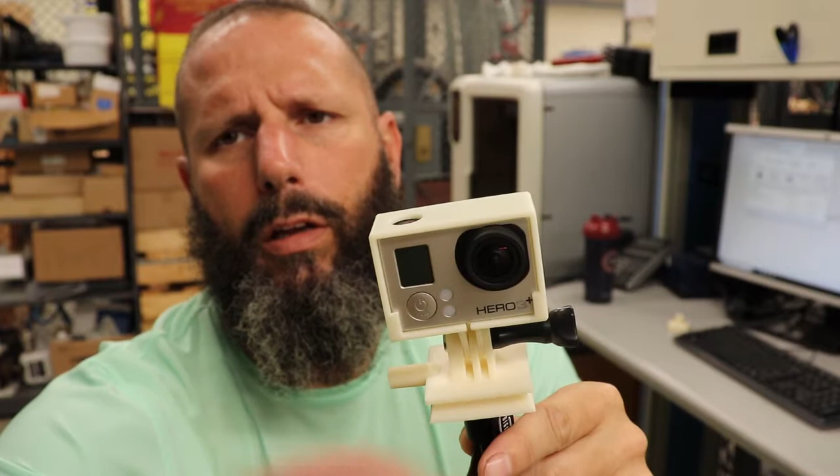So anyhow, it's a GoPro mount, and it has the little nubbin out here for using in my Noga. It has got this profile here that will slide into my tripod, and then the latest addition I did to this was adding a 1/4-20 nut on the underside so I can mount my little micro tripod and put this thing wherever I want.

So I'm going to walk you through the design process of that, and hopefully it will be helpful for you. When I first started 3D printing, I found it very difficult to find all the information I wanted, so I'm going to try to simplify that process.

I'm going to walk through the design process on SolidWorks, which is what we use here at work. I'm actually an AutoCAD guy - I learned AutoCAD way back in 1989, release 10 I believe it was. I've been working with SolidWorks for a couple years, but not as familiar or competent with it as I'd like to be, so I'm making a concerted effort to gain more familiarity and competence with it.

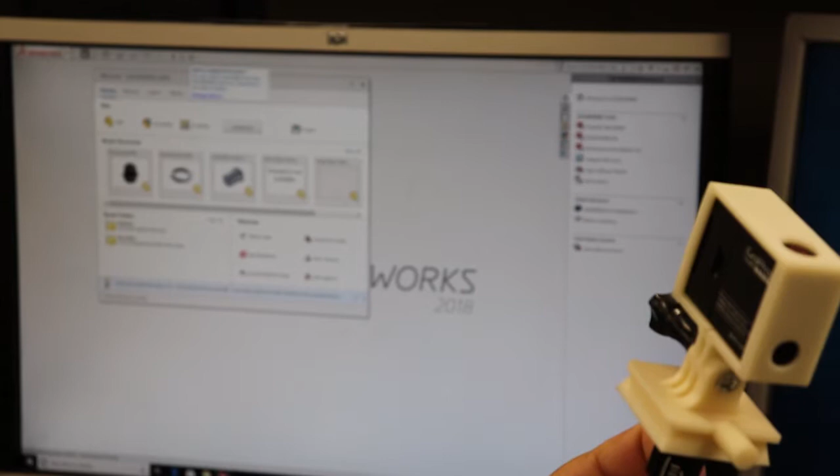So again, we're going to be designing this - I've done this a couple times - and we're just going to be designing this base part here, not the skeleton for the camera, which I actually grabbed off of Thingiverse. So, things that we're going to need.

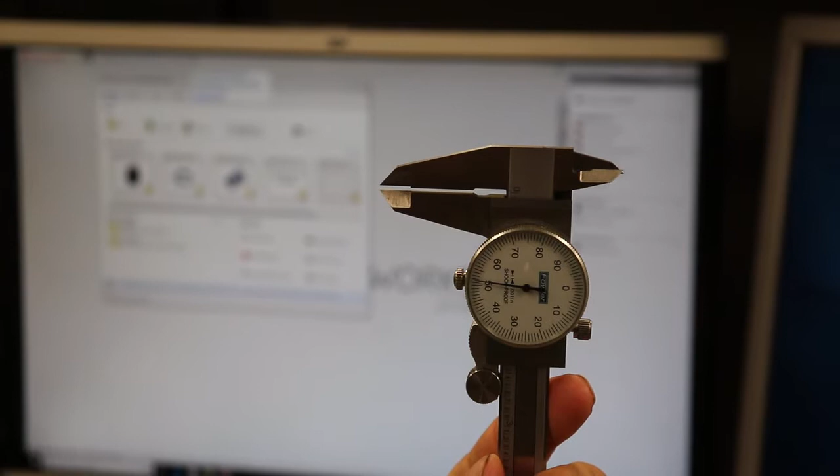Going to need some way to quasi-accurately measure, so we got here a Fowler dial caliper. I am going to be using...

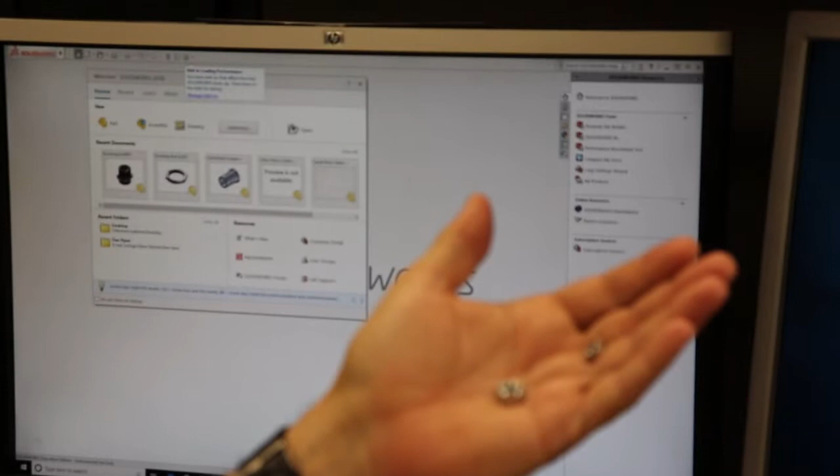Two different nuts - why did that just go out of focus? There we go. Two different nuts: one is an M5, which is for the screw handle on the opposite side here, and then the 1/4-20 is the other one, which will go in here.

Okay, all right, let me get you focused back in here on the screen. That looks pretty good. And so again, we use SolidWorks, also use Inventor from time to time, and AutoCAD. They're all somewhat similar, but they each have their own little ways of doing things.

So SolidWorks is what we use here at work at Taylor University, and as I stated earlier, I still don't have the competence with SolidWorks that I'd like to have, so I'm going to make it a concerted effort to get a little better. So we're going to start with a new part.

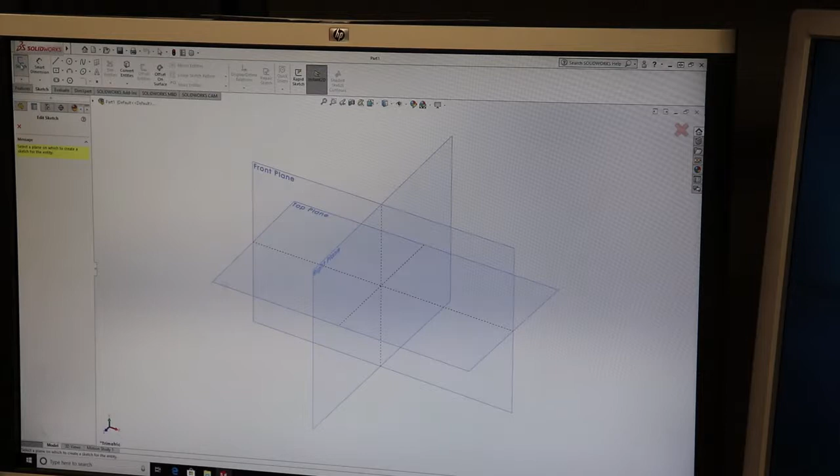And we'll go ahead and start with a sketch. I'm just going to go ahead and sketch it in the front plane. Alright, and so I'm terrible with math, so I do all my math on a calculator just to make sure.

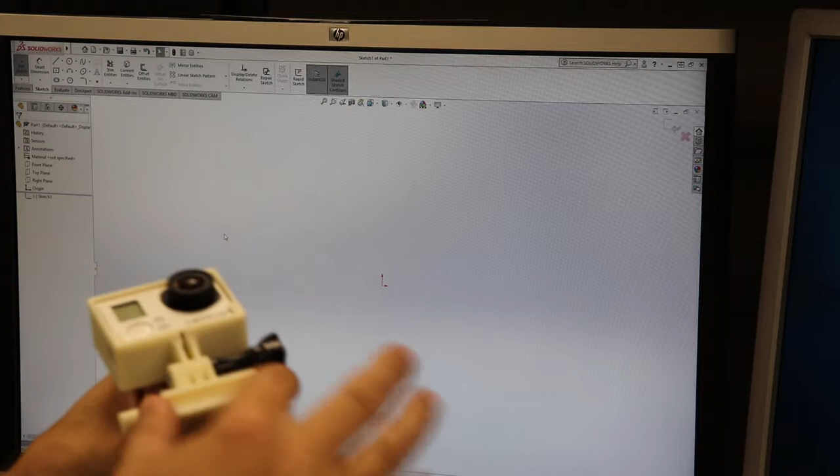So the actual bottom piece of this is 1.75 inches square, and so half of that is 0.875. So I'm just going to take and do a line and go 0.875 or thereabouts. Wait a minute. There we go. 0.875. Enter.

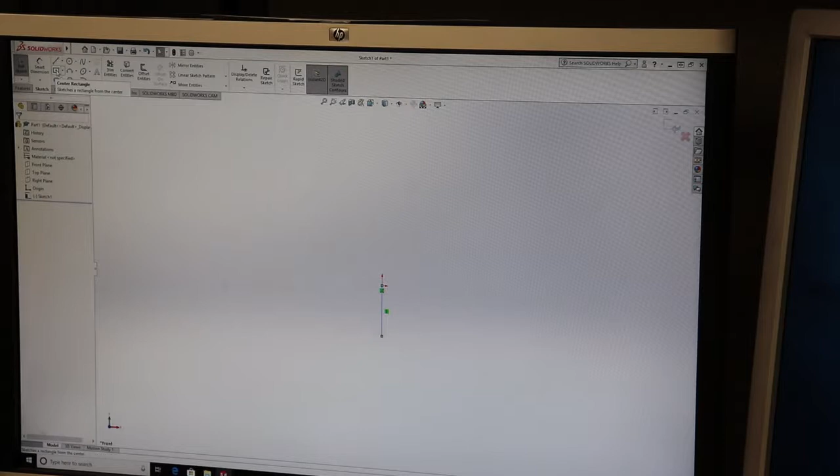Escape. So that's a construction line for me, and then I'm going to do a center rectangle and grab there, go there, and then I'll stretch that out to 1.75. So we're going to adjust these to 0.875. And there we go.

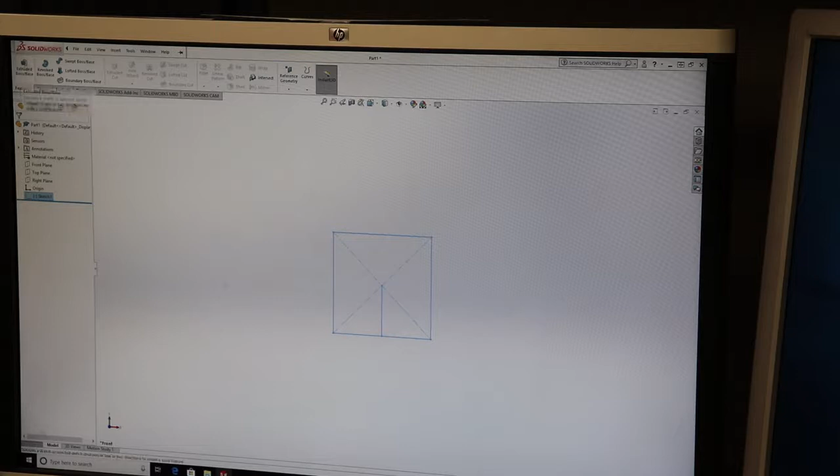Alright, so then I'll go ahead and exit the sketch. Features, extruded base, grab that whole thing, and then I think that is 0.375, I believe. Yep, 375, enter.

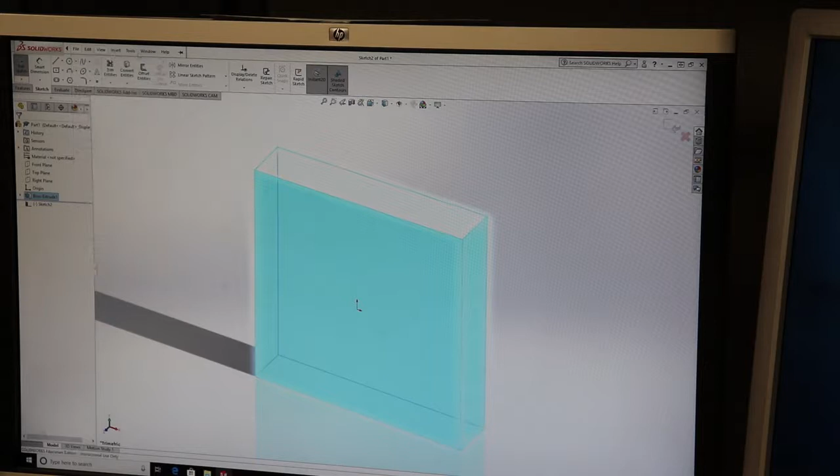That's good. All right, so go back to sketch, and then go right there. All right, actually, before I do that, let's go back to this. Let's go back. So what I want to do now is go ahead and...

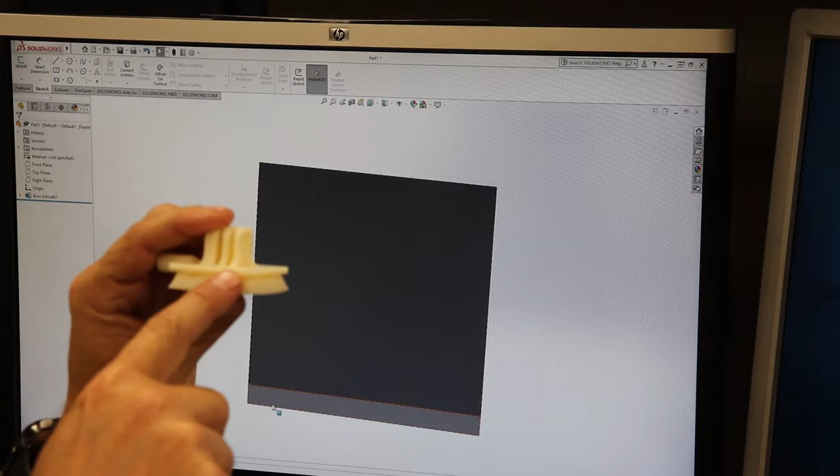This is a 45-degree taper right here - you can see that from the oblique angle there. And so we'll go ahead and do that.

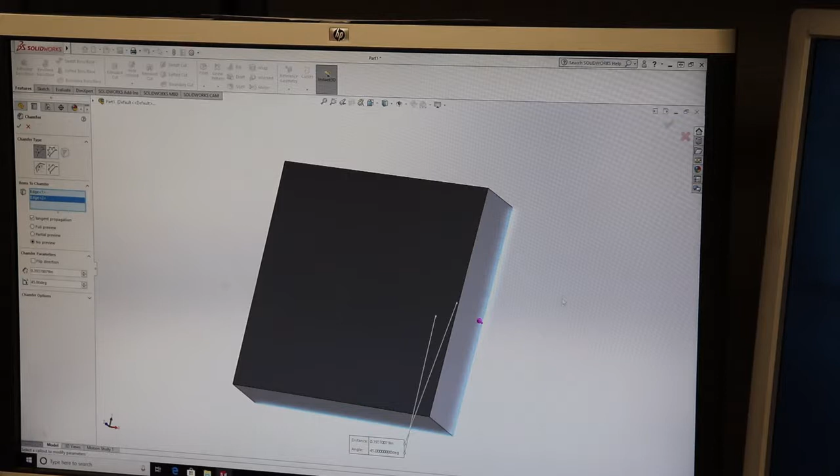So go back to features, and we'll go here. I don't want fillet, I want chamfer. And so, pick up those bottom edges, and that should get it. Oh, nope.

Up the wrong side, chamfer. There we go. That's what we want. Alright, so yay, that's what we want.

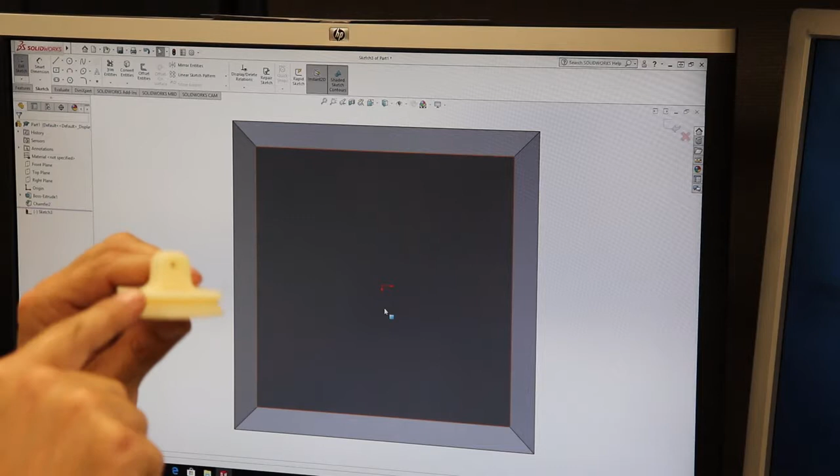Let's get this arranged somewhat. Go back here to this plane. Alright, now I'm going to go back into a sketch. Sketch again, pick the plane that I want to do it in, and then I'm going to do this little platform right here. Hopefully you can see that well. Go ahead and do that.

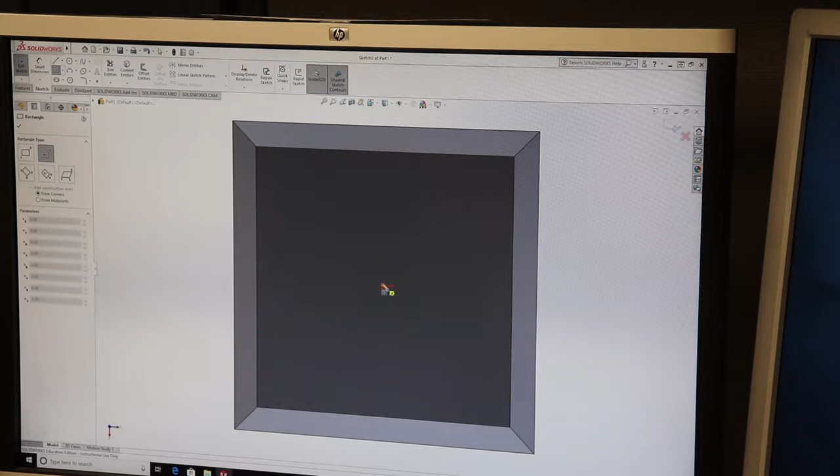And it's 1.75 as well. So I'll do the exact same thing that I did earlier. Actually, I don't even need to do that. I can just go ahead and do the center because I already have something that I can snap to. There we go.

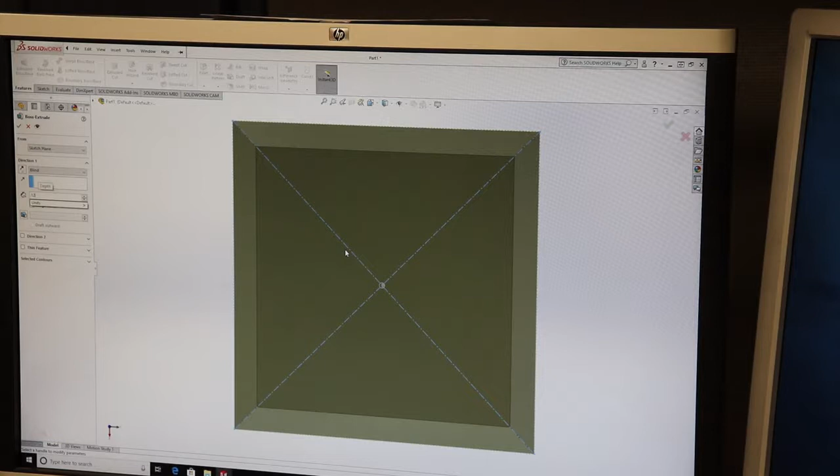Alright, exit sketch, features, extrude, that. And I think that's 1/8 of an inch. Yep. And go 0.125. And ta-da, alright, so now we got that. I will come back later and I will fillet these corners to make them nice and smooth.

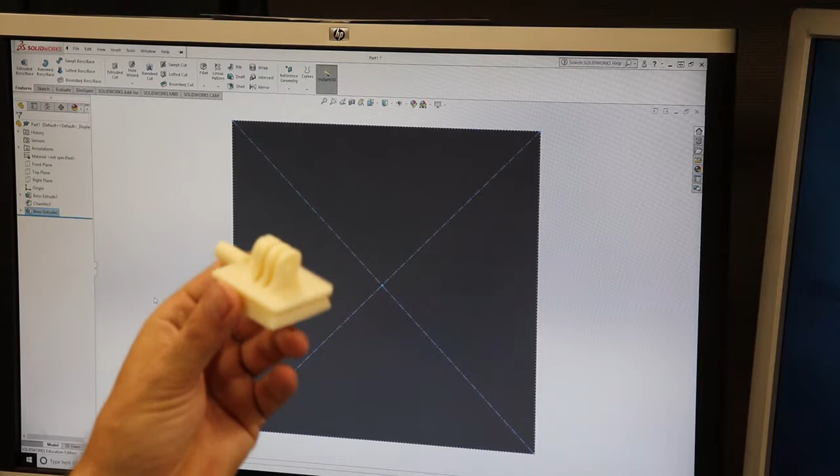Alright, let's go back to that. So the next thing that I'm going to draw is the geometry for these three fingers that actually clamp the GoPro to this. And so the whole thing, I think, is 3/4 of an inch, 750 thousandths.

So again, I'm going to do the same thing. I'm going to go to sketch, pick the plane, go right here, and then that was 750 thousandths wide by 625 thousandths across.

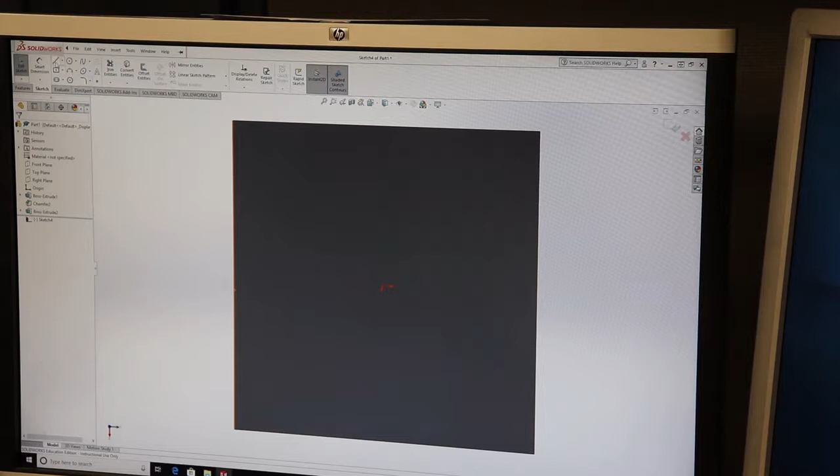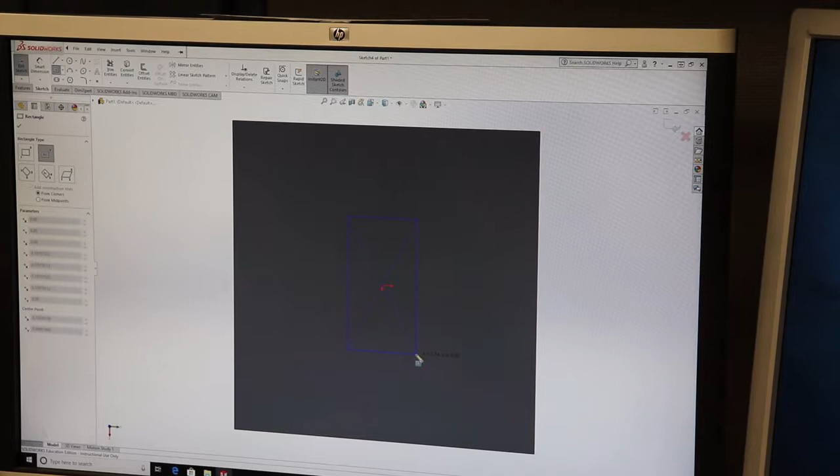So let's see. Let's go here. So let me do my math again. 0.75 by 625. I got to do my math here. 0.375. And then 625, 0.3125.

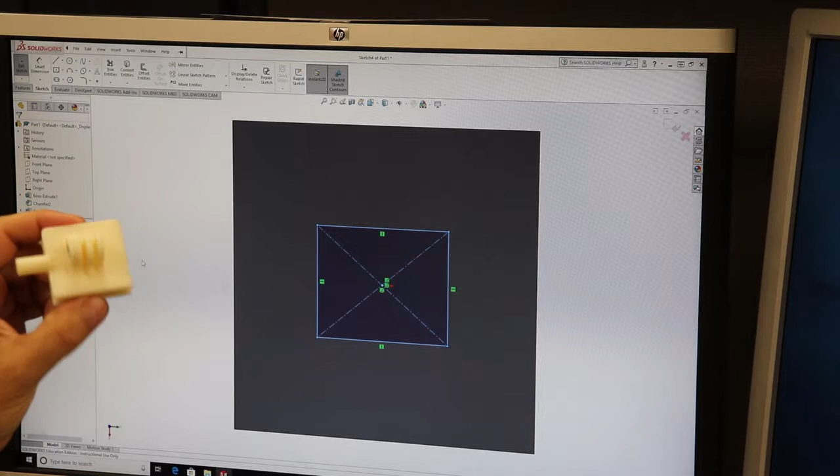Should work just fine. There we go. Okay, so that gives me my centered geometry for my fingers, and so now each of the fingers is 1/8 of an inch, 0.125, and then the gaps in between are 0.125, and then the larger gap here, the larger finger, is a little wider to accommodate the nut, and it's 0.25.

So let's see, let's do 0.25 first, and I'm just going to pick the line there. 0.25. Alright, so that gives me that.

I'll go ahead and pick up the center line of that and then drag it out. Alright, so there's that one. I'll go ahead and delete that line.

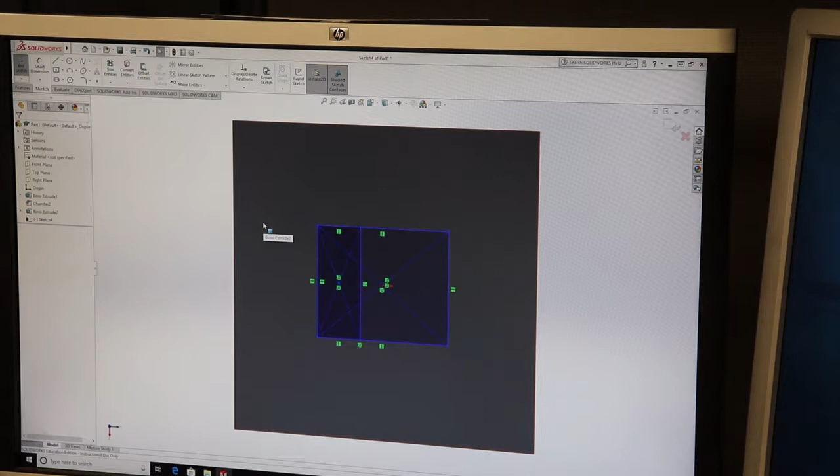Alright, now I need 1/8 of an inch for a gap. So again, I'll just do a line, and I'm going to start right there. 0.125. Alright, and then I'm going to go ahead and do another line, 0.125 from the end of that.

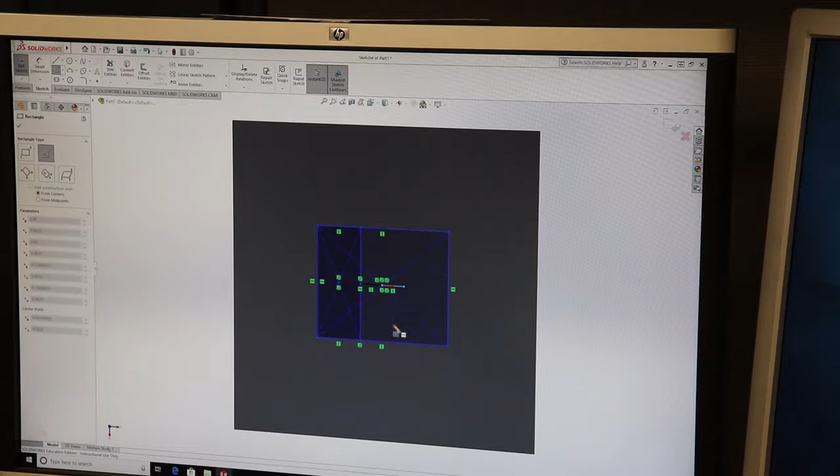And I'll go ahead and do my center. Just drag her down. Okay, go ahead and delete out these extra lines to avoid confusion later on.

Alright, so I need another, and actually I could just do a line here. 0.125. And then do my center. So there that is. Go ahead and delete that.

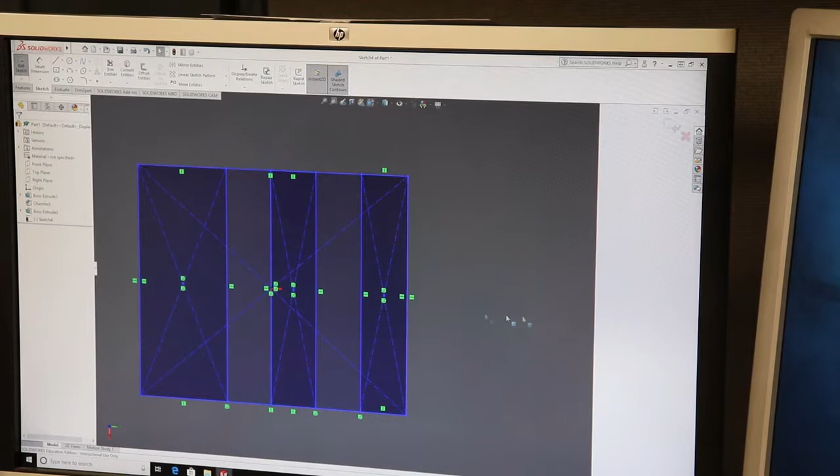Alright, so what that did is it gave me the profile for my fingers, my mounting fingers, the geometry I should say. So I'm going to exit sketch, go back to features, and I'm going to do extrude.

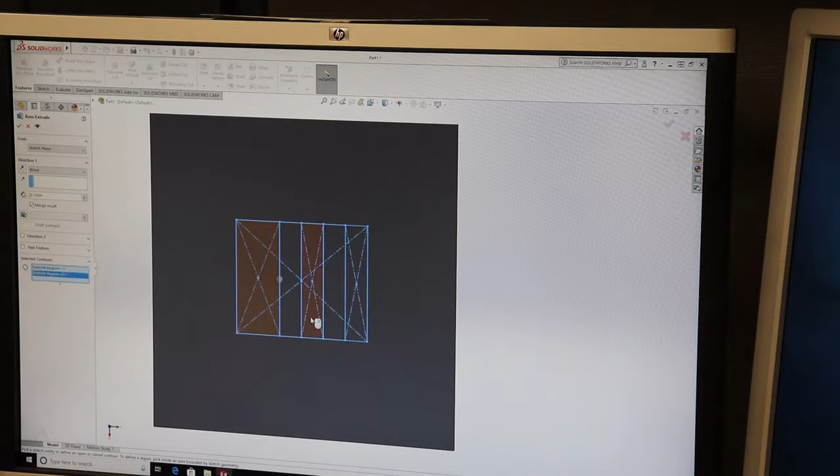And then I'm going to pick those. I don't remember how tall those are, 3/4 of an inch. Go up here, 0.75, and just go ahead and extrude those.

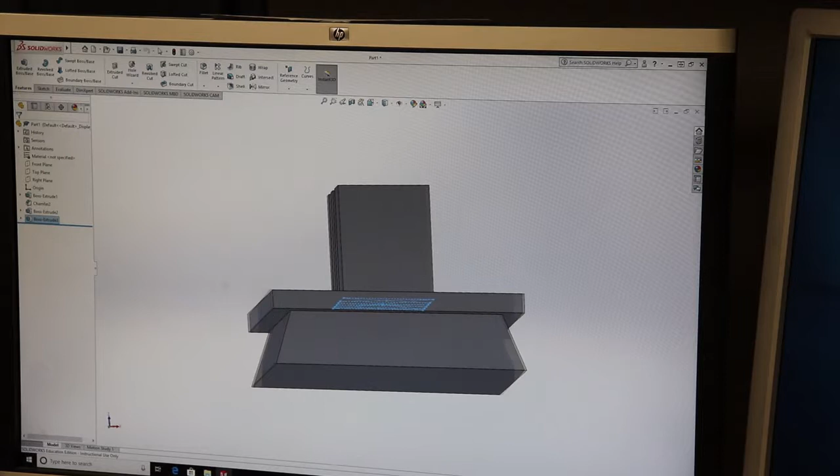Alright, so now we're actually starting to look like something here. Okay, so I will actually do some filleting on those, but before I do that, this is the thing I struggle with the most, getting this silly thing so I can get it the way I want it. Alright, so while I still have square geometry, I'm going to fillet this in a minute, but I'm going to go ahead and set up for the hole for this M5 nut.

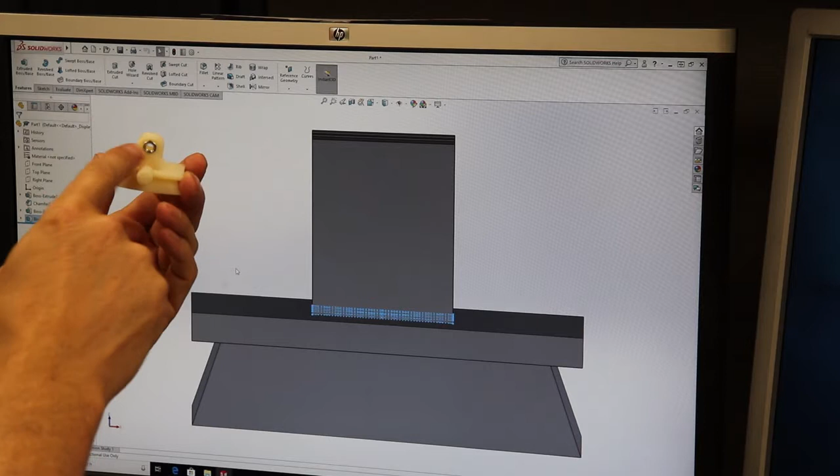So first thing I need to know is, I'm going to look at from corner to corner what's the largest diameter, and it's a little under 0.35, so I'm going to go ahead and make it 0.35. And then I also need to know how far down, and I think that was 1/4 of an inch. Yep, 1/4 of an inch.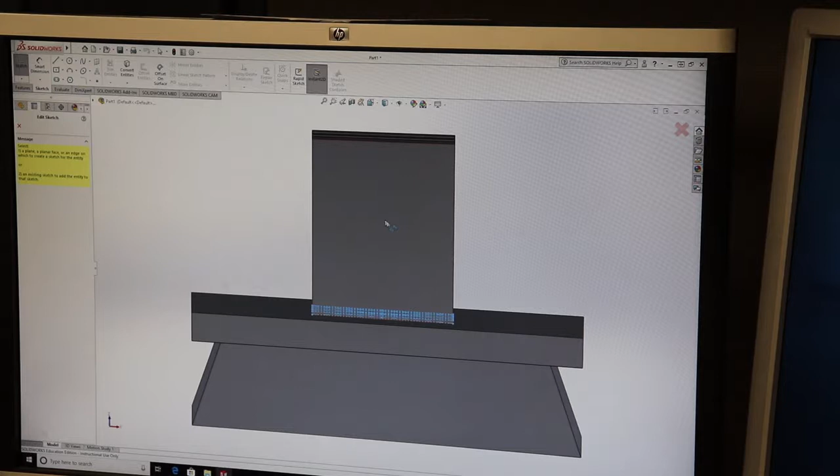So let me go ahead and do sketch, pick there. Let's see, I'm going to do a line and do it from there. And about 0.25, enter. Yep.

Okay, so that gives me the center line, it gives me the center line and the distance, the offset distance from the top here to the center of the nut. I'm going to go over here and grab my polygon, it's already set up for a 6-sided. Before I do that though, I need to...

0.35, half of that is 0.175, right? 35 times 0.5, 0.175, just to make sure. So I just go ahead and from there I'm going to go... that doesn't seem right.

Hold on. 0.35, 0.175, yeah okay. 0.175 there, escape.

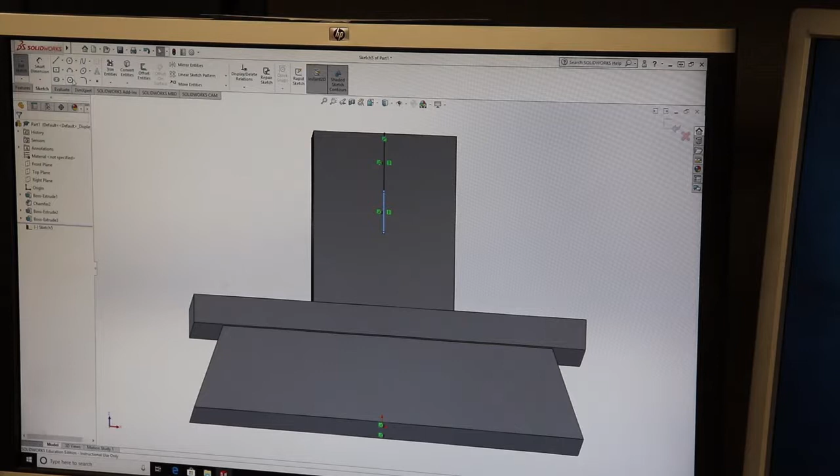Alright, and I'm going to leave this in place, otherwise I can wind up shifting the location of the hole inadvertently. So what I'm going to do is just grab there, and drag the point of it down to there, and that gives me my geometry for that.

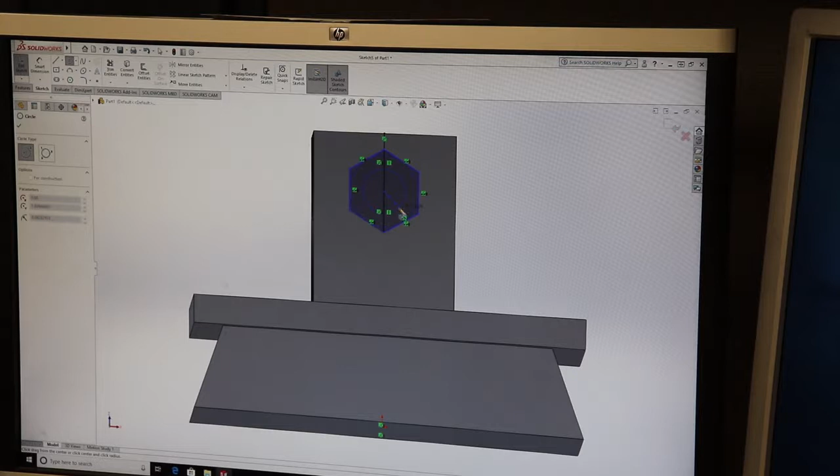Now I also need to make a through hole that goes all the way through this. So I can go ahead and set up the geometry for that while I'm here. I'll just do a circle, pick up the center there, and it's actually a 0.2, 200 thousandths diameter, so radius on that is 0.1.

Alright, exit sketch, features, go ahead and do an extruded cut, and we'll cut that through all, click, right, and then I'm also going to do an extruded cut. Dang it.

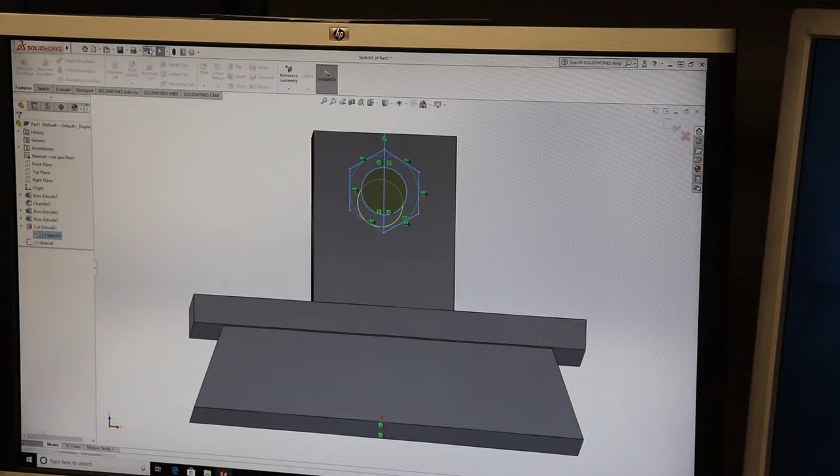Thing's being silly. Let's go back. Sketch 5. This is one of the things that does frustrate me from time to time, it doesn't do what you think it should do.

Thickness of the nut is 0.15. It's a little bit deeper than that, so we'll go 0.16.

Alright, so that made that cut. And then should be able then to extrude cut. Exit sketch.

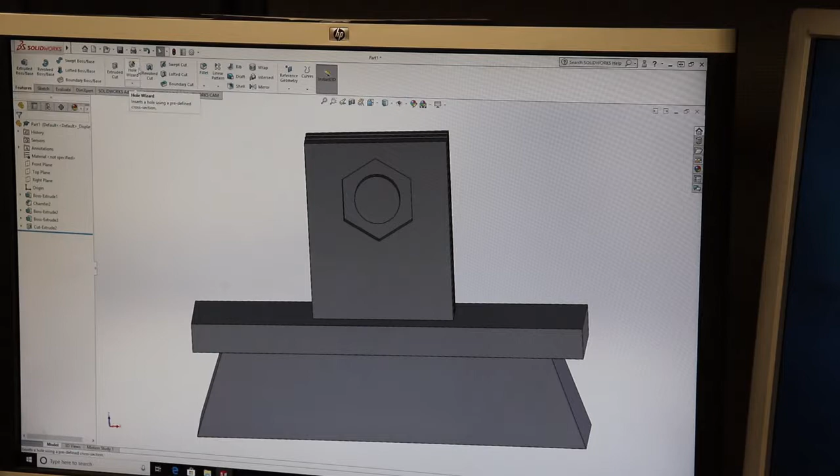Okay, here we are back. I'm still not sure what happened there, but this is one of the things where I don't have the confidence level. Sometimes I'll do something silly and it's just frustrating to figure out how to undo it, or it'll do something like that where it just did not want to go. So anyhow, we're back to it.

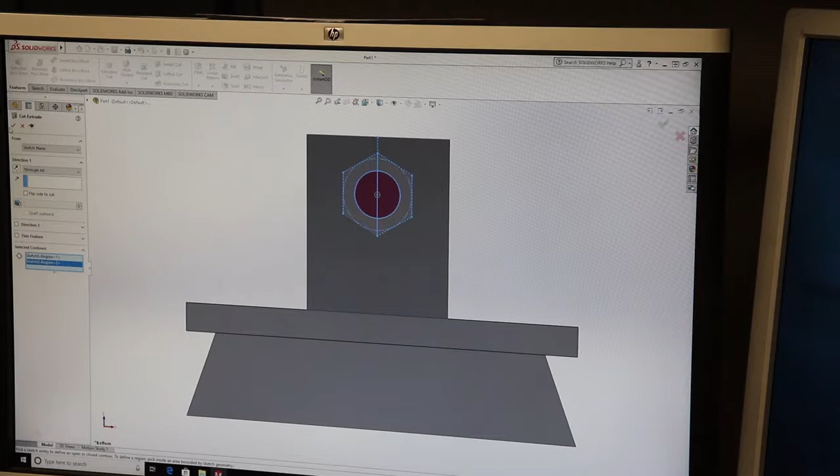So now I've got that selected. Instead of blind, we're going to go through all and then cut, and there we go. We've got a hole all the way through, and we've got our space in here for the nut to sit in.

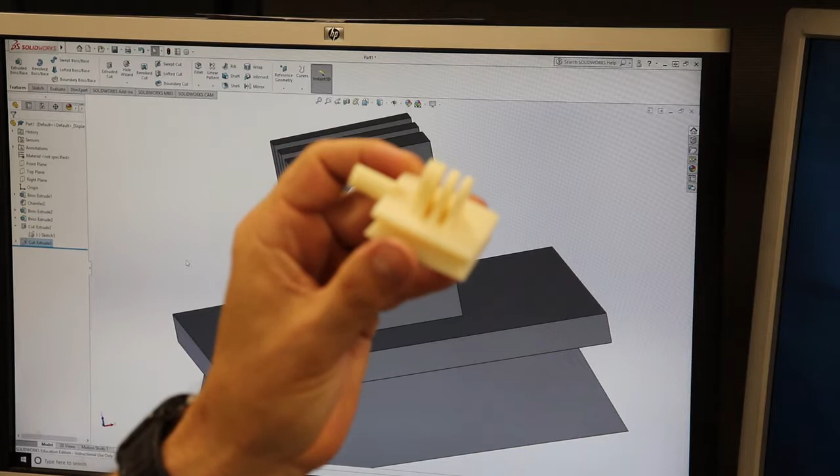Alright, so now the next thing we need to do is we'll go ahead and do the filleting. We'll do the filleting here on the top and at the base, so we'll make those nice and rounded. Get your focus back in on that. There we go.

Alright, so fillet. Let's do the bottom first. I think that I did a 0.25 on that before. Yep, that looks good.

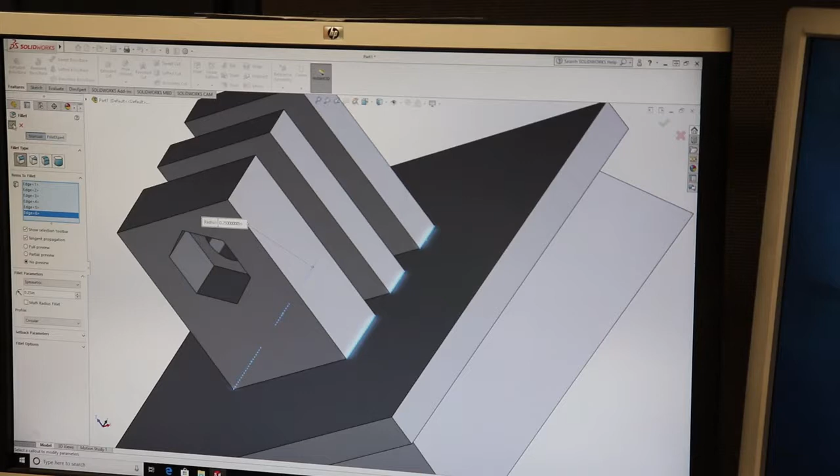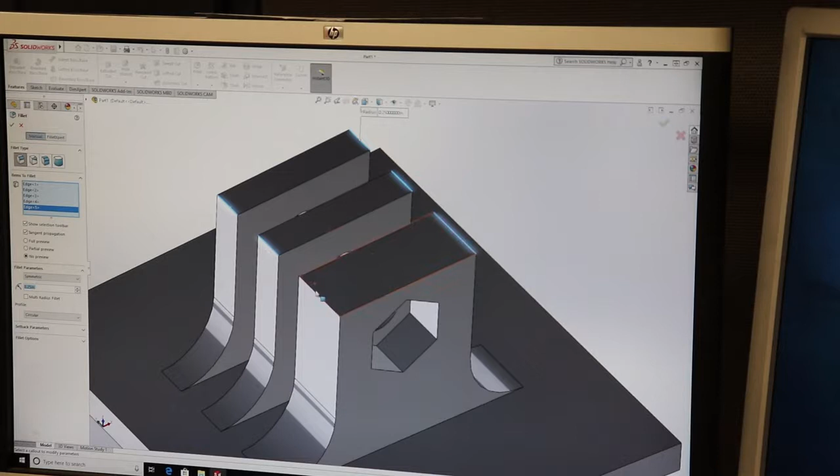Now we'll do the exact same on the tops. It's already defaulted back to what I set for the last time. And there we go, that looks nice.

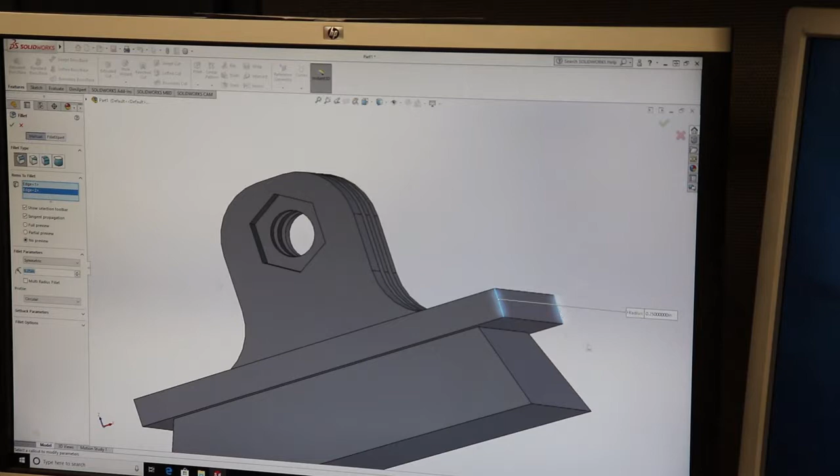Alright, while we're at it, we can go ahead and fillet these corners. So we'll select fillet, and I think I want to do 0.675 on those, I think. 0.675, make for a nice small round.

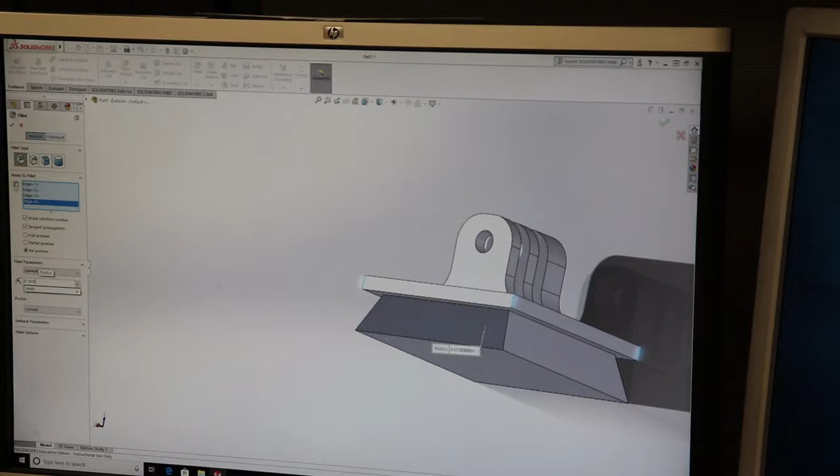Nope. About 0.1875. There we go, so it makes for a nice smooth transition there.

Alright, so we're almost done. So I need to add, go ahead and add this, and that's a 3/8 inch, 0.375 by 0.625, I believe. I don't really remember for sure, we'll measure it here in a moment.

Alright, so I'm going to go back here, go ahead and go back to my sketch. Yeah, pick a spot there. And the easiest way to pick up the center here is just to draw a line from the center line down. Alright, that gives me a place to center this.

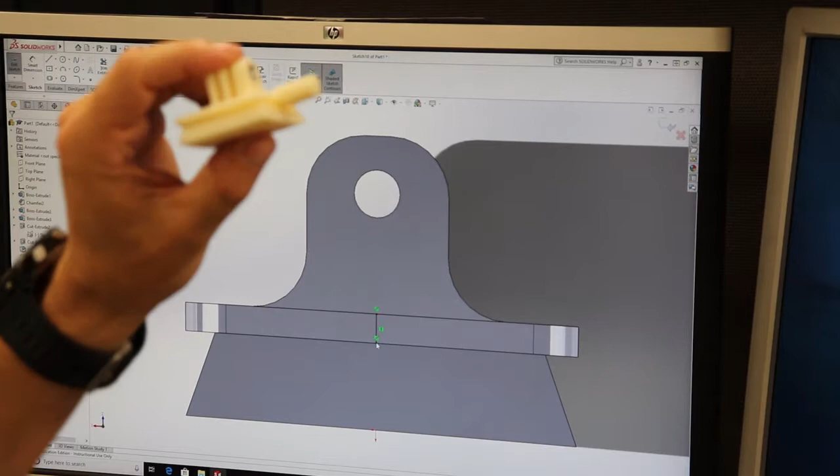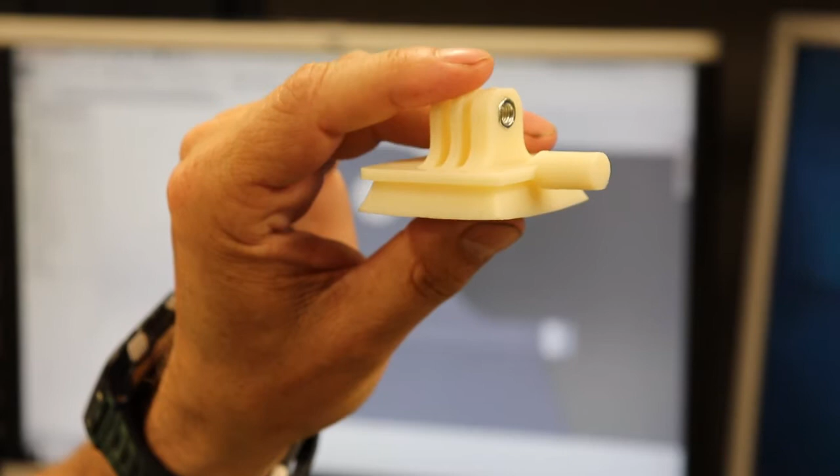Because this is bigger than that platform. That platform is 125 thousandths thick, and the little extrusion there is 0.375. Alright, so draw that because this circle is going to be a little bit bigger.

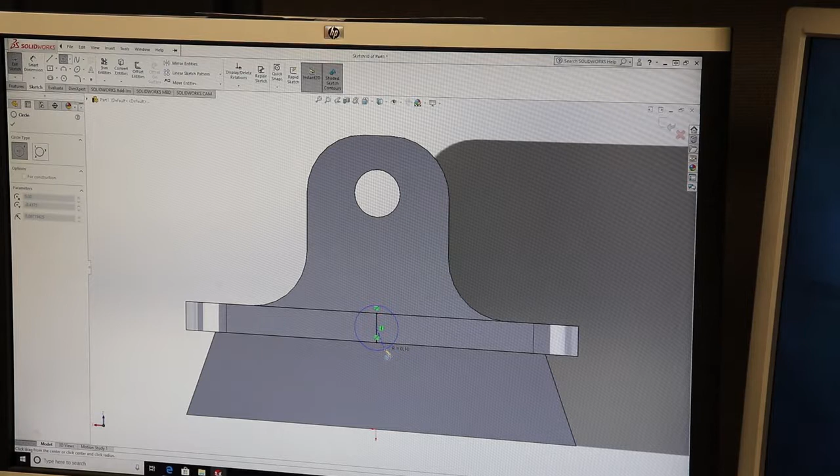Alright, and I'm just going to grab a circle, go there, and then 0.375 times 0.5 is 0.1875. I knew that, I don't know why I had to do that, but whatever. 0.1875. Okay, alright, going to go ahead and exit sketch.

Features, extrude, boss base. And we're going to select all this area. And then, how far did I want to do that? 625. 0.625. Okay, bingo.

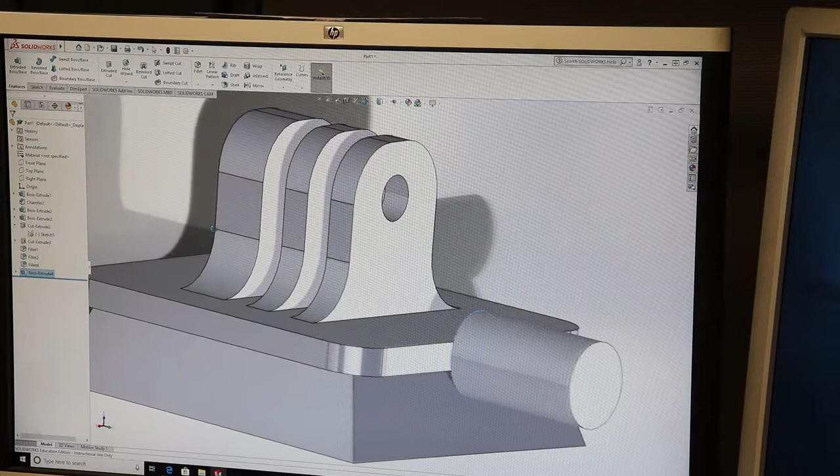Looks good. Alright, now we need to add a little bit of filleting here to add some strength to it. So go to my fillet, and I think that 0.1875 will actually work there. Nope. What did I use? Maybe it was 100 thousandths.

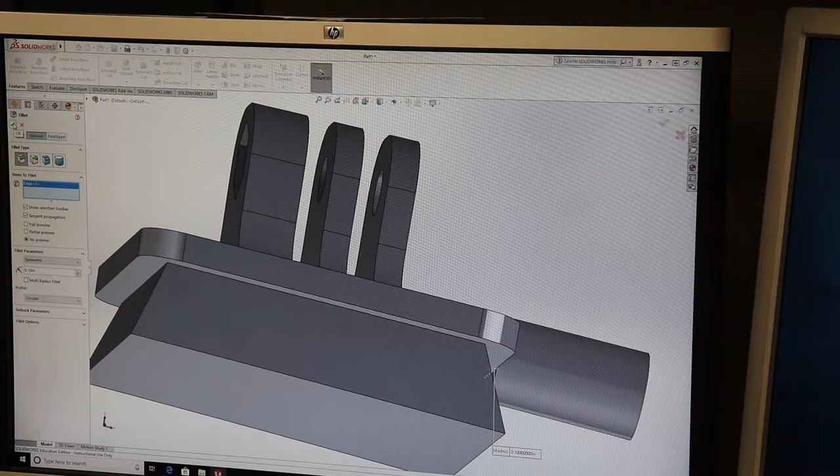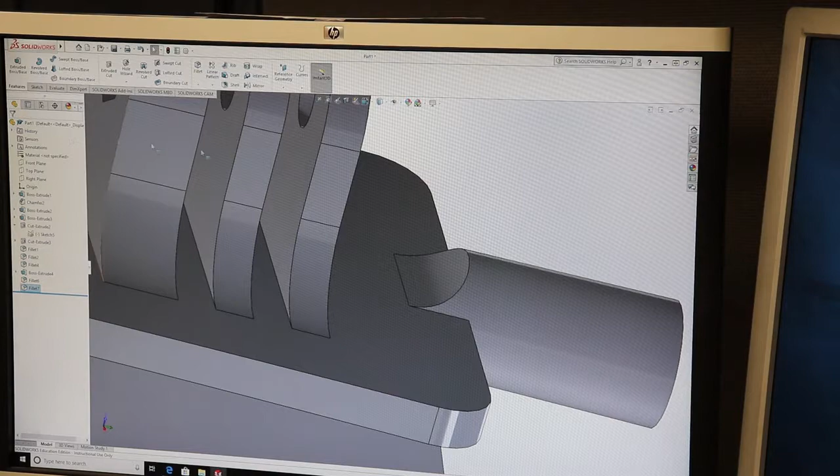There it went. Okay, so now we've got a nice little fillet there, and then I think I wanted 0.1875 there. There it goes, yeah, okay, so it makes for a nice fillet, adds some strength to that.

Okay, so we're almost done with this. Going to go ahead and flip it over here, get it back on a view that's most advantageous to me.

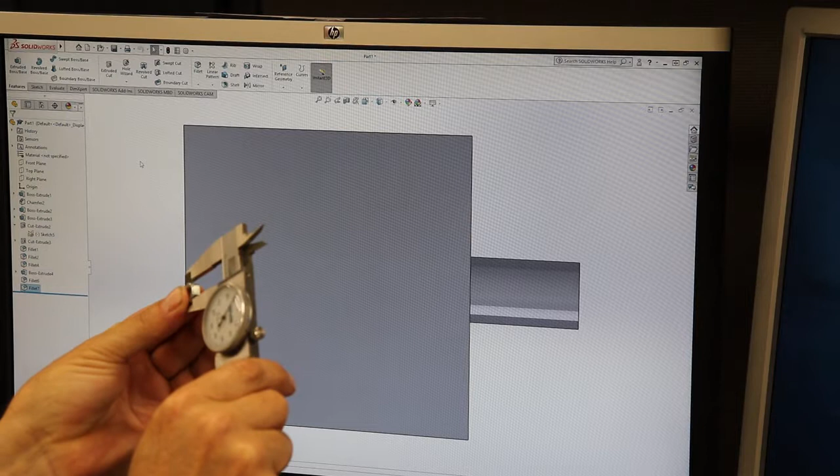Alright, so the last thing that I have to do with this is get the, again, from corner to corner, the largest size of this nut, which is about 491 thousandths, and I'm going to give that about 15 or 16 thousandths. So I'm going to do 0.505. So 0.505 times 0.5 is 0.2525.

Alright, so sketch here, and let's go ahead and do a line. And 0.2525, enter, escape. Again, that just gives me a reference line, and then I'm going to grab my polygon shape here, and drag that far corner down to there. There it is, hit OK.

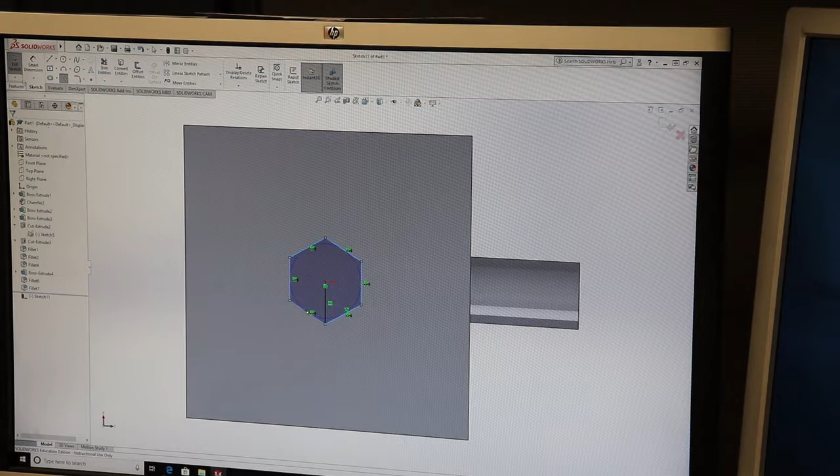Exit sketch. Features. We're going to do an extruded cut of this. The thickness of this is about 220 thousandths. I'm going to go a little bit deep.

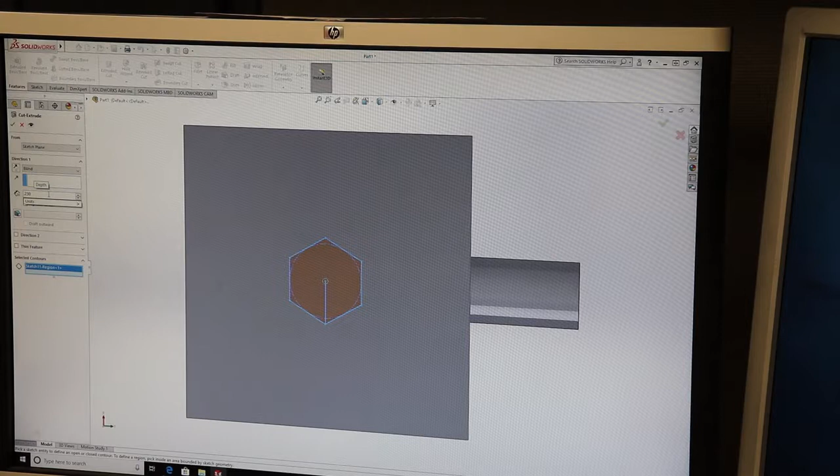I'm going to go to 225. Maybe I'll do it 230. 0.230, because I want that to actually be fully engulfed. Alright, and there it is, so there we have our full part done.

So last thing I have to do, I'm going to go ahead and file, save as. Alright, let me... Dalcher.

Alright, so this is the GoPro adapter final, and it's the Noga tripod and micro tripod.

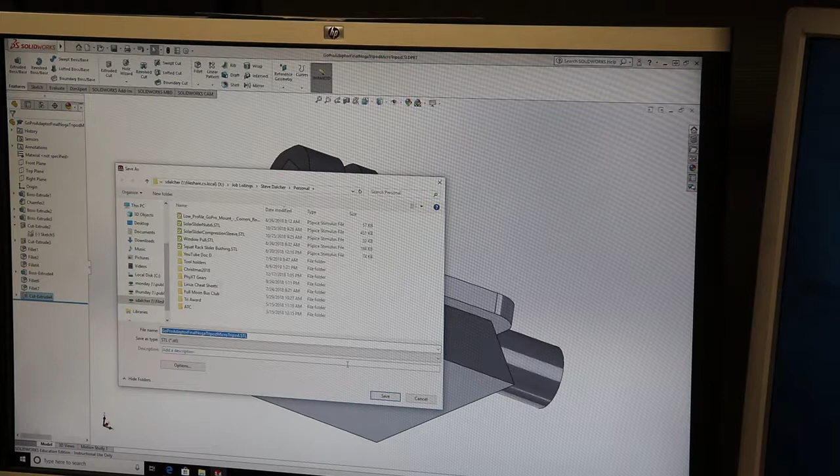Okay, so I'm saving it as a SolidWorks drawing or part. Now I'm also going to do, and this is the important part, save it as an STL. So I'm going to go down here, and instead of the default .sldprt SolidWorks part, I'm going to click STL, which stands for stereolithographic file, save it as that, and answer yes. You can see it's actually generating toolpath geometry in essence. So there it is.

Alright, so now what I need to do is take that STL file, come back to me here. Wrong way. So now what I have to do is take that STL file. I use Catalyst 4.4, the program we use to control our Uprint, our Stratasys Uprint SE Plus 3D printer. It'll take that STL file, I'll change the orientation so it's most advantageous for printing, and then create a .cmb.gz file, which is what Catalyst uses to actually send to the 3D printer. So we'll do that here in just a second. More to follow. Thanks.

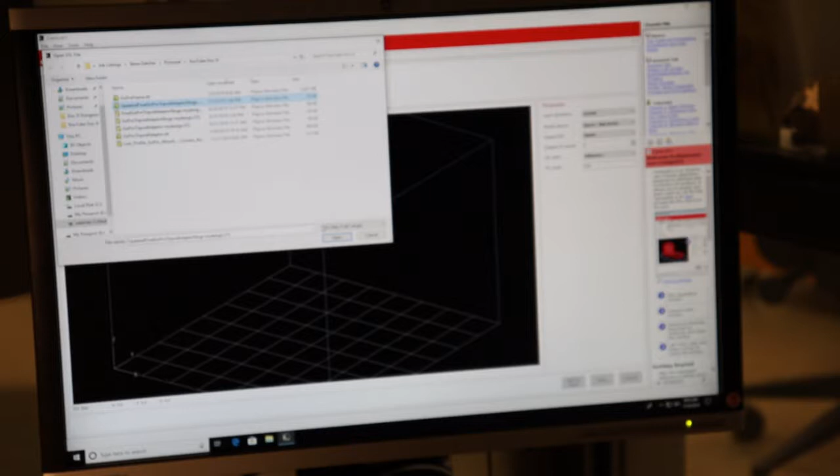Okay, so here we are. We just designed our part in SolidWorks and saved it as an STL file. Now I've opened up Catalyst EX 4.4, and what I'm going to do is select File, Open STL, and then we'll find that file. Actually, this is not the same file—this is an older file, but it's fine.

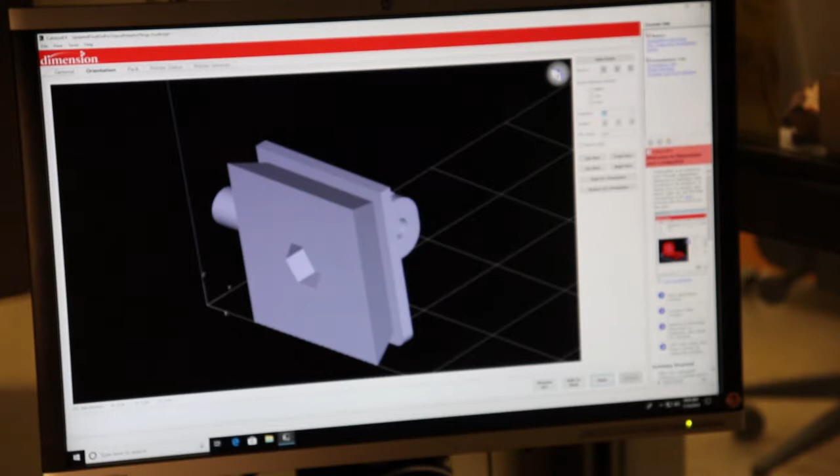So here we have our part, but it's on its side, and while it will print like that, I'll get a much better print if I put this flat side down. So I'm going to go over and click on orientation, and then go X, flip it 90. Yeah, that'll be fine. Alright, so now what I'm going to do is process STL.

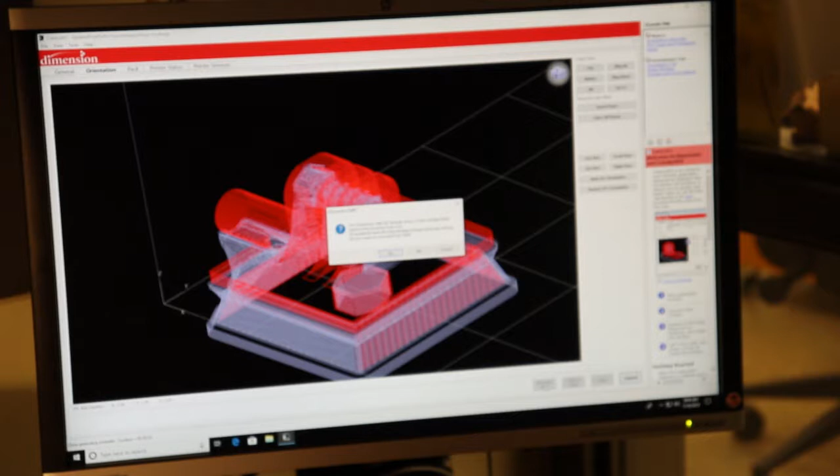So what you see it doing is actually creating the tool paths for the extruder to follow. There are two different types of tool paths. Our Uprint SE Plus has a dual extruder, so one head is for the soluble support and the other is for the model material. The model material is the red, and the white is the soluble support that goes in to help hold everything together so that when it prints, the overhangs don't sag down, essentially.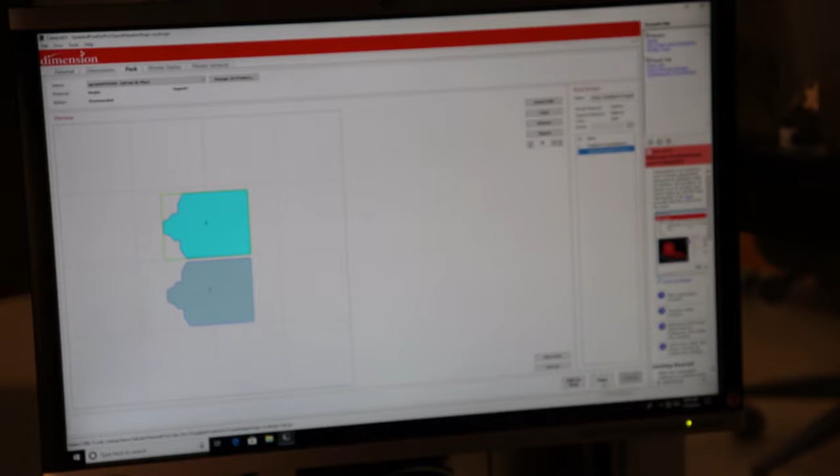Alright, and so there it is. I'm going to go ahead and go to Pack and just insert the CMB. There it is. Alright, there it is. If I wanted to put another one in there, I could just go ahead and do another one, and I could print as many as I wanted, as long as it fits within the work area of the actual printer. And then from that point, I would just go to print. Go. Alright.

And so now it sends that information to the printer. The printer is going to do its thing. It's going to go through, initialize, and make sure that everything is square, and then it will actually start printing. When I first started this, I really couldn't find a video that showed how we got to the final part, so hopefully this is helpful to you, and I look forward to comments. Thank you.

Alright, so here we go. I turned on the 3D printer. It's actually going through an initialization process at the moment, and it's going to go through a bunch of checks. The thing about the Stratasys printers is the very high quality—the entire work area is heated, and that reduces warpage of your parts. So it'll go through this. It's now asking me if I removed the last part. So yeah, open the door because I already removed it. Part's been removed.

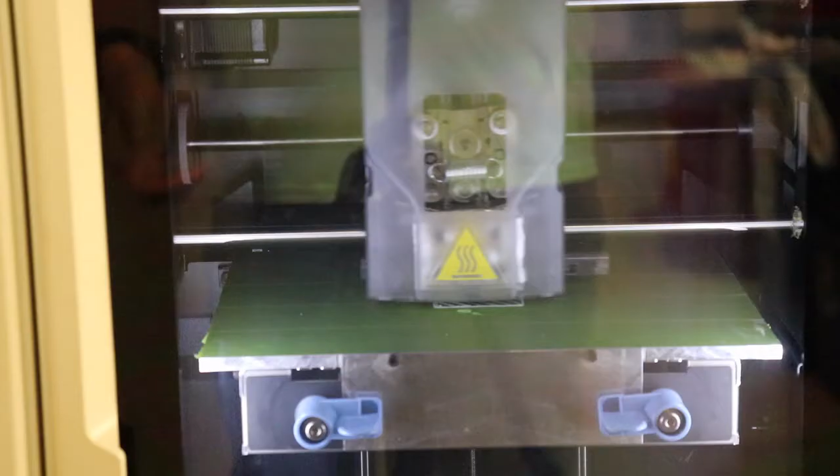So what it's doing right now is laying down that raft I was talking about, just a layer of soluble support that it builds upon. It's designed to give good adhesion to your printing plate, and then your model material will adhere directly to the soluble support raft. It's going to go back and forth over that a couple of times, and it'll cross-hatch it here in just a moment to create a solid bedding.

I'll bring you back from time to time as it goes through the process so you get kind of a time lapse of what it's doing. It should do about one more pass, I think, before it starts cross-hatching, maybe. It's going to do a couple more passes. It just keeps building here.

This is kind of like the laser cutter kind of measurement. There it goes, there it starts cross-hatching. Again, it's just building a nice little raft, that's what they call the raft, to build a model on. I'll bring it back periodically as it does its thing, and then we'll throw it in the caustic tank and show you the end result.

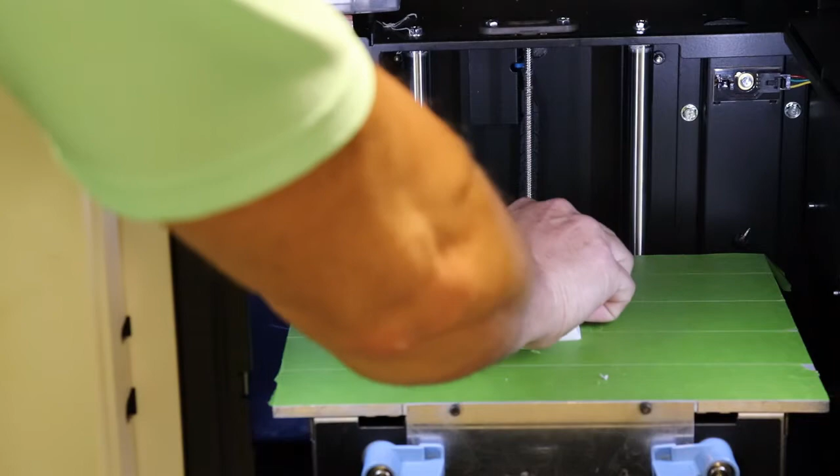Alright, so there we have the completed part. So just come down here and pull it off there. Let's see if I can.

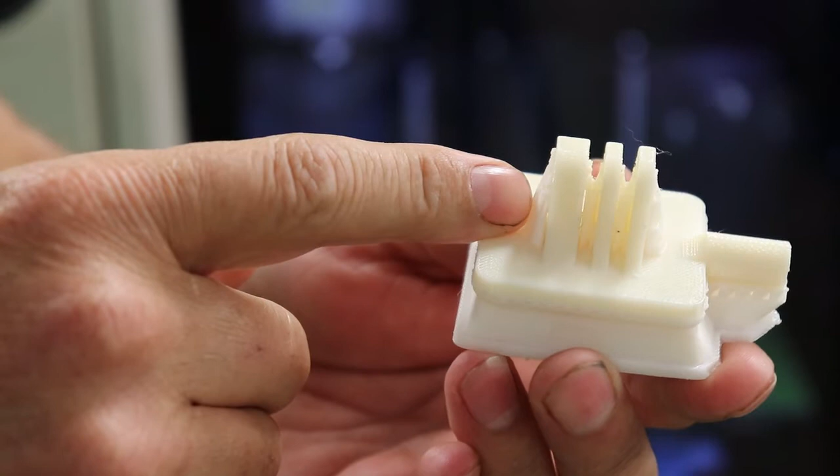So you can see the raft of the soluble support. This is what binds to the plate, the printing plate, and you can see how it formed a support there for the through hole, and also built a little bit of a raft to support this because it wasn't actually touching the bottom. So this will go into my tank of soluble support and come out in an hour or two.

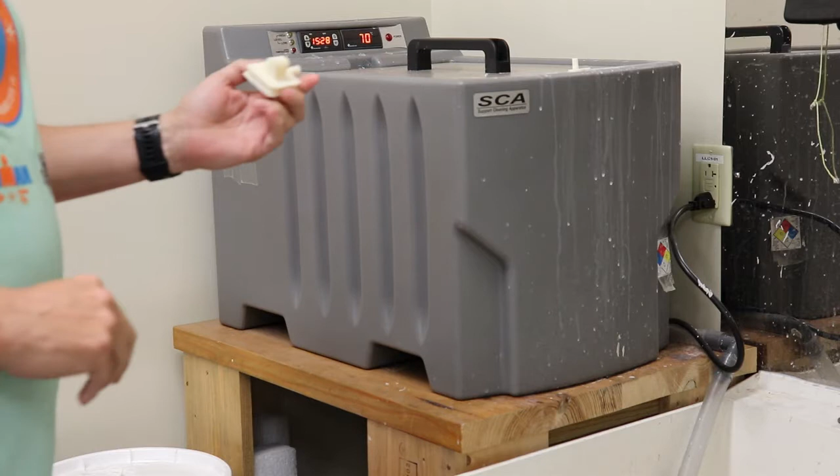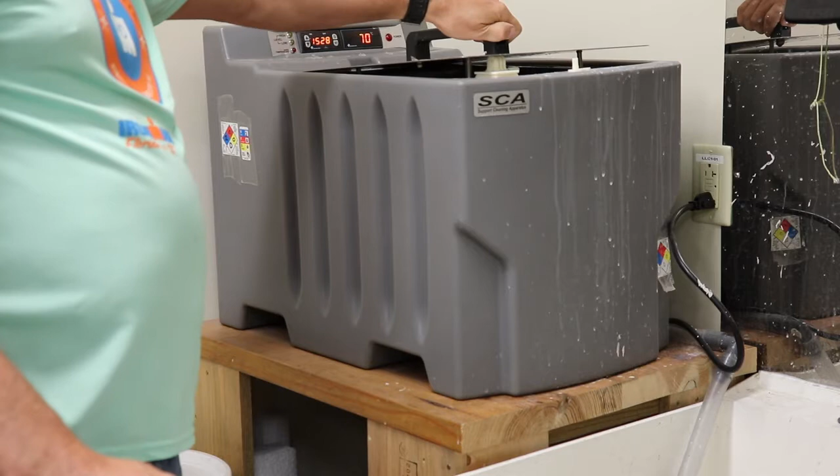Alright, so here we have our tank with the caustic bath to dissolve the soluble support. I went ahead and cleaned off most of what I could of it, which allows the process to go a little bit faster and doesn't bind up as much of the caustic bath. So here we go, we'll set it in here, and then we'll come back in an hour and it should be ready.

Okay, so it's been about an hour, and this should be ready. Go ahead and pluck this out of here. Looks like everything is good. And there we have it, finished product.

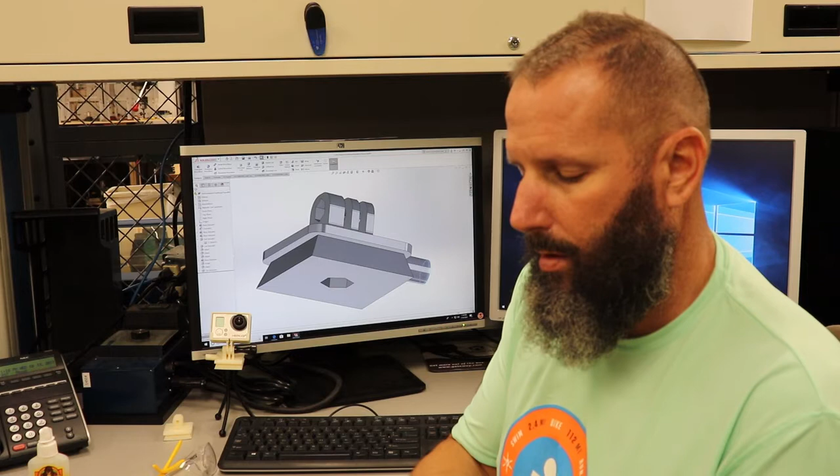Alright, so the last little bit of this, got it out of the acid bath. I've got a 1/4-20 bolt here, it's going to be a nice slide fit, and then I've got my M5 bolt or a nut, and that one's going to be a little tighter. So I'm just going to press that in lightly with a pair of needle nose pliers. Oops, maybe.

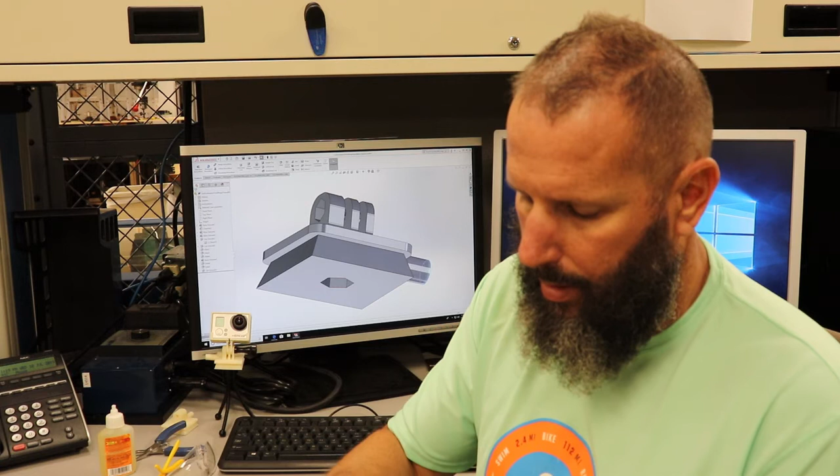And then for the bottom one, I'm going to put just a little bit of Gorilla Glue in the bottom of it, just to bond it. And when I say just a little bit, I mean just a little bit. And we'll drop that down in there. That one's a nice snug fit as well. There we go.